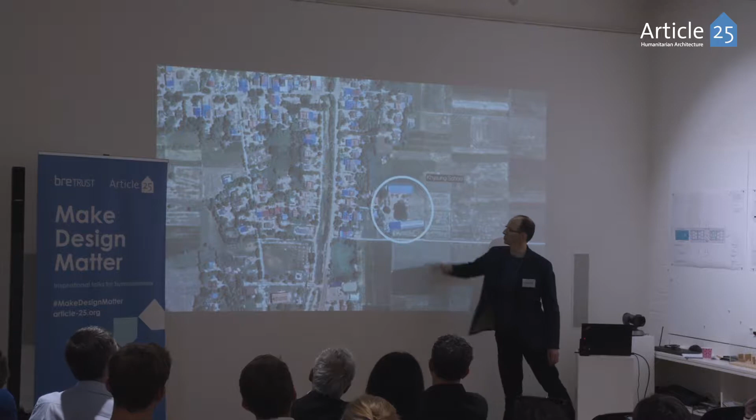So the village itself is relatively small, and the site is an existing school which had two buildings, a large block here and a smaller one here, very much built around a courtyard sort of space, and it was built on the edge of the village, looking out over vast expanses of rice paddy fields, with the core centre of the village to the other side. Central to the site was a series of really prominent trees, which are quite lovely, that you'll see in some forthcoming photos. The climate in Cambodia is tropical, so it has its monsoon season June through to October, and the very heavy rains that brings generally flood quite a lot of the school compound itself, and obviously the paddy fields themselves.

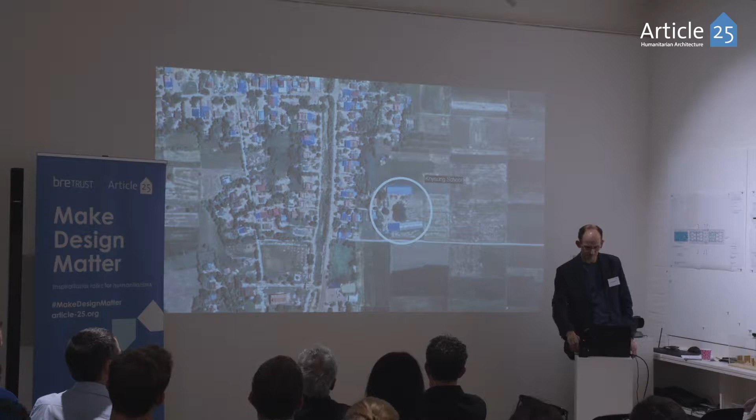There was generally always a Honda 50cc motorbike under there. There were always three or four very, very angry dogs if you went very close. For some reason, not many cats at all. Hammocks where, during the day, the villagers would generally sleep to avoid the temperature.

But then some really, really elegant detailing in the timber work. Generally the roofs traditionally were tiled, and it's a bit of a shame, but you can understand why: the more modern materials that are creeping in, with coloured sheeting for the roofs, etc., are changing that sort of vernacular a little bit. That was quite noticeable, but really beautiful.

And the primary colours that they were using then to highlight shutters on their windows or the individual panels for the cladding themselves, which was generally sort of timber.

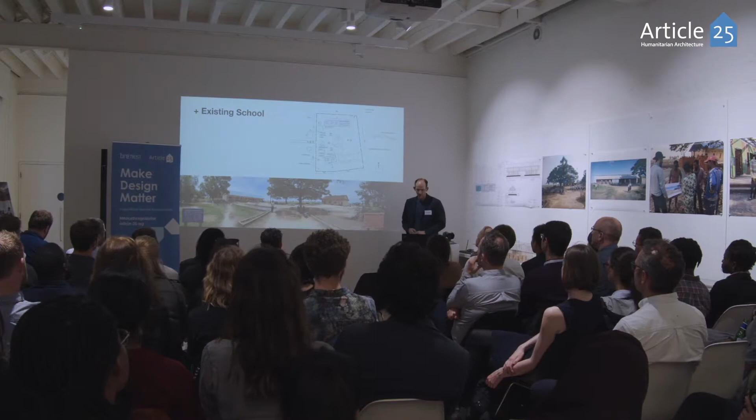So the diagram at the top shows the school compound itself. Building Trust did a lot of the early reconnaissance for us in terms of talking to the school itself. And the school was part of a group of village schools in the neighbourhood that all sort of connect. The Khyaung school was unique in the sense that it was primary and secondary, whereas the other five schools in the region were only primary. So they had a lot of pressure.

The population is growing quite immensely in Cambodia as a result of the atrocities back in the late 70s, so there's a real spike going on. So they are really lacking in school places, and a lot of the population don't have access to school. So part of the reasoning for this project was to increase that capacity.

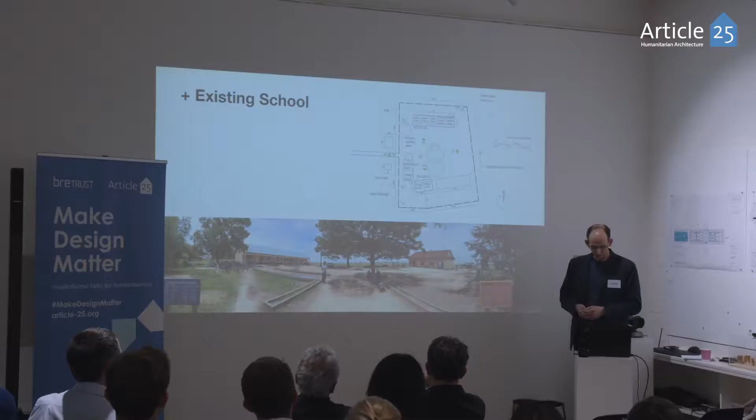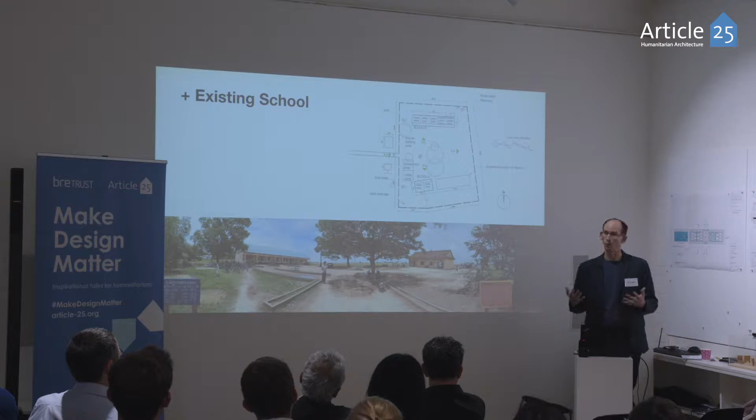And because they're overstretched, they run a morning school from 7 till I think 11 or 12, and then all of those children go home, and then the next wave come in for the afternoon. So they have to split the school day to cope with the capacity that they're dealing with. So our work obviously helped to alleviate that.

One of the older buildings on the site is quite dilapidated, so these images really show what they're dealing with. Particularly during the monsoon time, the rain is pouring through. They have to carry out a lot of their classes out under the verandas, actually outside. So that really demonstrates the need for the new school.

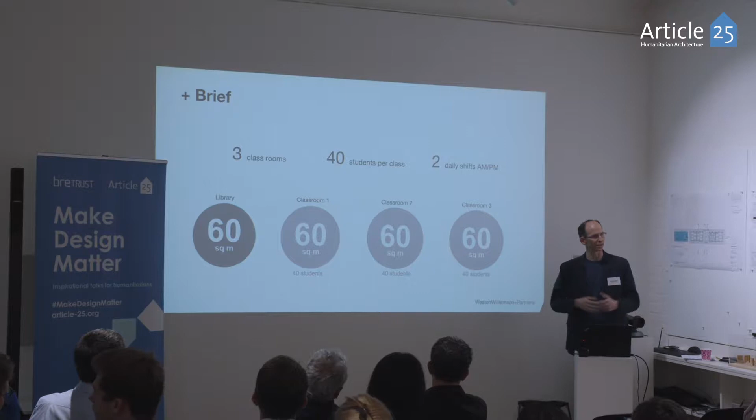So the brief we were given was to provide them with three classrooms, around 40 students each, and in terms of area about 60 square metres each, slightly larger than the existing classrooms they had. They were also keen to have a designated library space, which they were sort of squeezing into the corners of the current school buildings. And again, I've talked about the daily shifts that they still need to run to accommodate those students coming in.

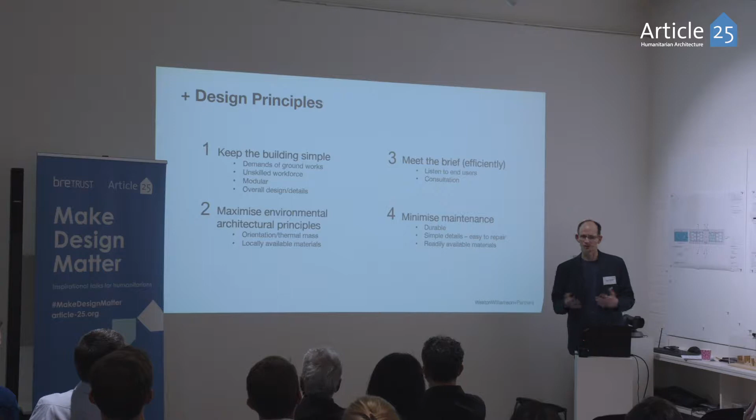And we worked with Building Trust again to establish, there's nothing too unique here, but it's really important to understand those key design principles at the beginning: what was available in terms of materiality, the labour, how we can deliver that; the environmental principles, to understand the climate and learn from their existing buildings where they're failing; particularly listening to them as the stakeholders, the teachers, and what the wider villages also need; and making sure that what we design is durable and long-lasting.

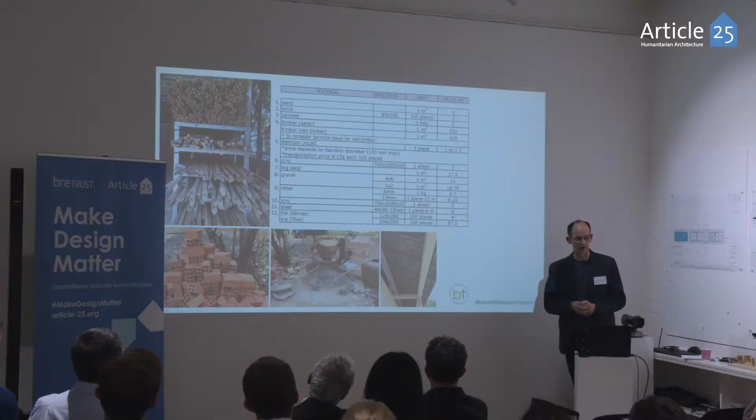We actually, in the end, developed our design not using some of the bamboo or so much of the timber, but very much the key, as you'll see as we go on, is that local brick module there with its 4 holes. That became a key part of our design.

So it was fundamental that we could hit that build program, otherwise we really were going to be pushing on another school year or another half a year before we could start.

So we ran the process from WW+P, once we'd established that brief and those key parameters, by opening it up to our whole studio, by giving them a briefing, and then we gave them about a couple of weeks to come up with their own ideas. And then we held a series of charrettes where they presented those back, and then a core group who were leading the project would then go through the quite difficult process of piecing together what we felt were some of those best ideas. But it was really fantastic. A lot of those then fed into the final design.

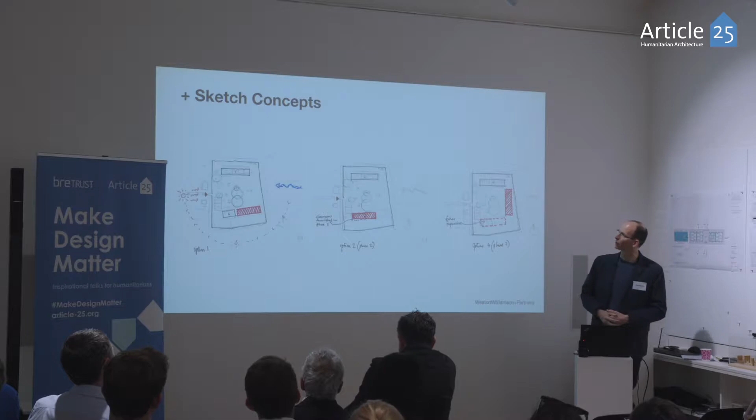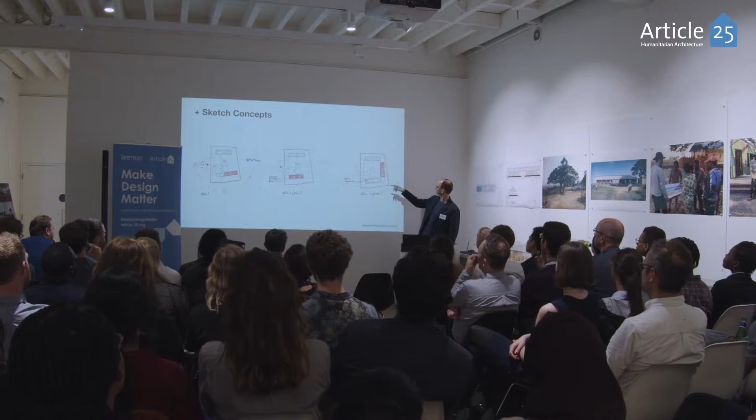So these are just a couple of slides. I won't go into too much detail, but some of the responses that we got. So some people took a very environmental approach. Others looked very much at the detail and form, and it was great to get that variety. This one was more about understanding phasing with the existing buildings, either to plug on or to build independently, or to think in the future how future expansion of the school could work in and around the courtyard itself.

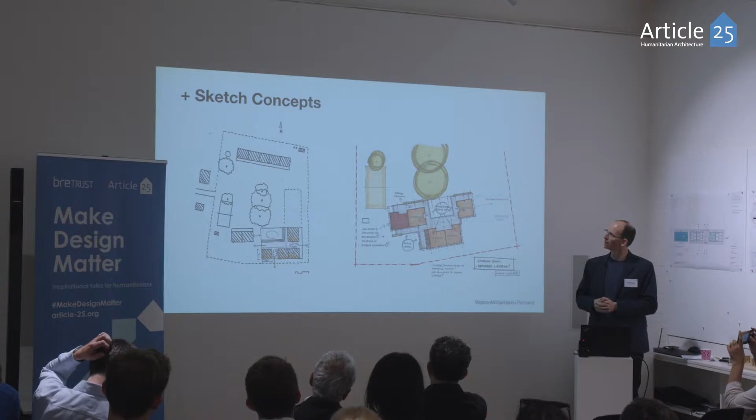A different level of drawing that you get back is always interesting. This is quite precise and detailed, and really looked at how those spaces could work. This was just one of our colleagues, looking at different outside spaces that are really important in and around those buildings. So not just the buildings itself, but where the children can play and learn, adjacent to the designs.

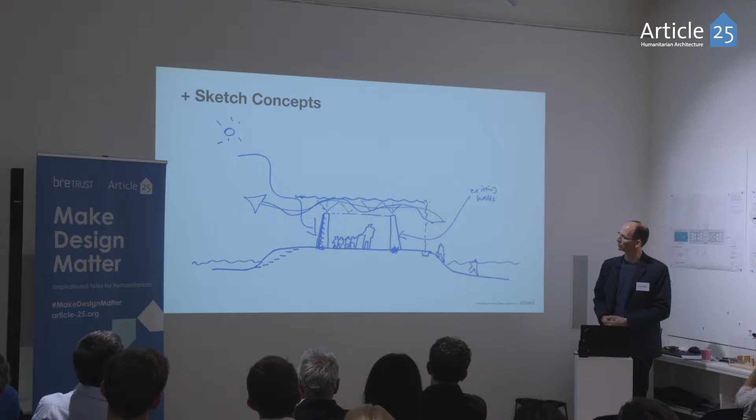Others that are much simpler, really just labouring on, and quite rightly, the importance of those fundamental principles of exploiting the passive ventilation, building on the plinth to avoid the monsoon flooding, etc.

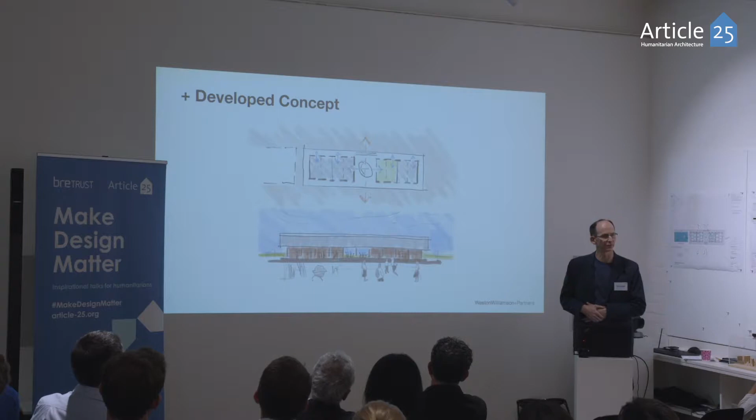And then we developed that to close in a more developed concept, of which this was an early sketch. And then we arrived at a very simple plinth building. The grey in the diagram at the top there indicates the 3 classrooms I've talked about. The green is the library. And then what we did, which has been I think one of the major successes, is just then pulling those apart to create this covered outside space, which is so important in the inclement weather, and provides a further view through to the landscape.

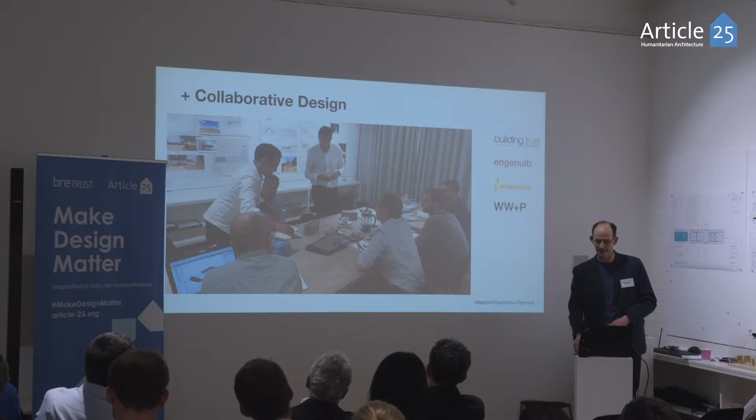And then Building Trust went out and took some of those early ideas. So that is very, very quick, but it just shows you a bit of that early stage consultation that they did, and then brought back some of those findings back into London, where again David here from Building Trust was over at certain points, and then working through bringing some of those materials, the brick, onto the table, so that we could get a real feel for those early days. And then as we progressed, we just worked up the level of detail of those drawings through more developed sketches.

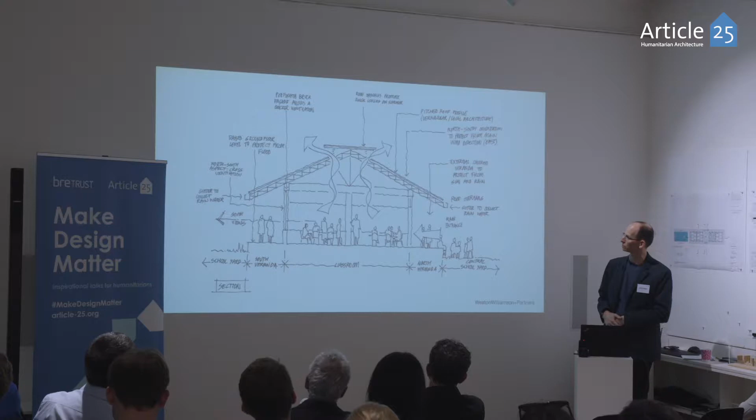Understanding the sizes, the modules, the grid that we were going to use in a bit more detail. And again, through in terms of the section, and again, working with our team here to understand what size overhangs we need, how the structure was beginning to work, the spans, and how the passive ventilation was starting to play out. And then we produced a set of tender drawings, again discussing with Building Trust the right level of detail that they would then take out to tender to chosen contractors.

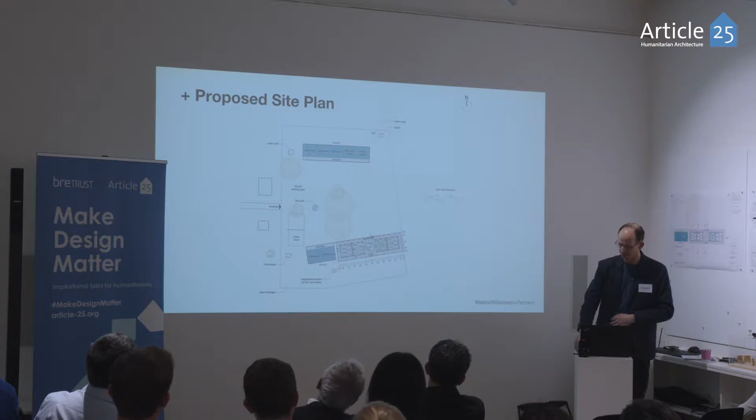So this is really just to show you the level of detail that we went to in terms of information that formed a pack itself. So again, a high level drawing of our building placed within that compound. And then the general arrangement drawing, broadly working on a 3.5 metre grid across the site. And some of the key sections and elevations.

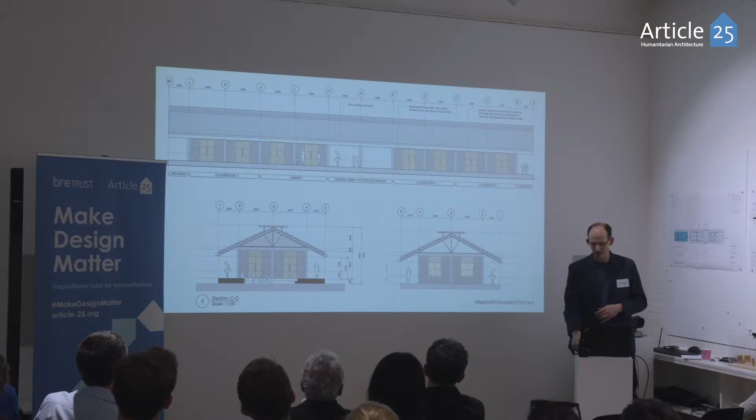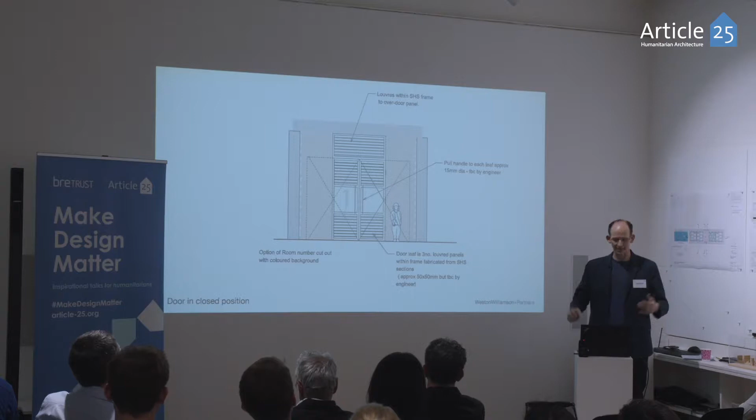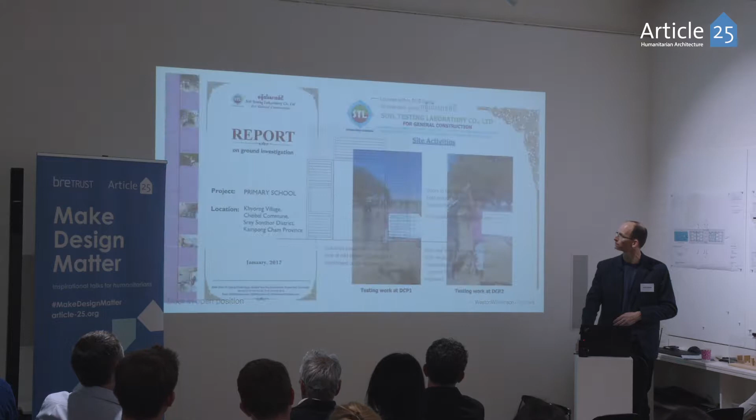So it's a bit of a jump into John now to come up and talk about some of the structural design in a bit more detail and some of the things we had to wrestle with on the site. So come on up, thanks.

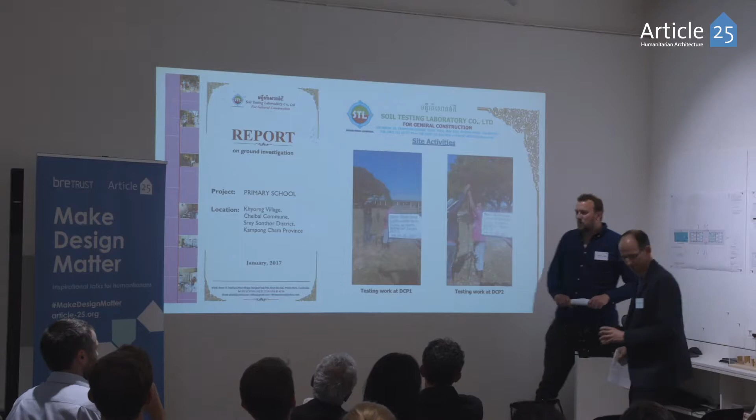We were quite delighted to be asked to help with this project, and it was something quite unlike anything we'd done before. We'd built plenty of schools, we worked internationally, but we'd never put the two together in quite this way. So when we were asked, we actually just paused for a moment and went and asked our engineers, if we do this, are you going to support us with your time and ideas? And there was a resounding yes. So we sort of dived in.

And as a structural engineer, thinking about this project, the first thing we like to do is think about the design criteria. What is it that's defining how we're going to design this building? And we've already heard about the climate, which is the massive one. So we've got this very hot and wet climate. You've seen the impact on those existing buildings, the timber rotting away and things. We've seen the raised podium. We need to include all these things into our design.

On top of that, we've got things like the local design codes. Well, they don't have any local design codes. Most of what's built in Cambodia at the moment is through international aid. And when people do that, they bring their own codes. And we did the same, unfortunately. We used Eurocodes.

This is one of the first things, it took quite a while to get it. One of the first things we asked for, and in January we received this little report, which for us was very important. It's a very simple site investigation. It tells us what the quality of the ground is like, where we can found this building, and just to keep it all safe and strong.

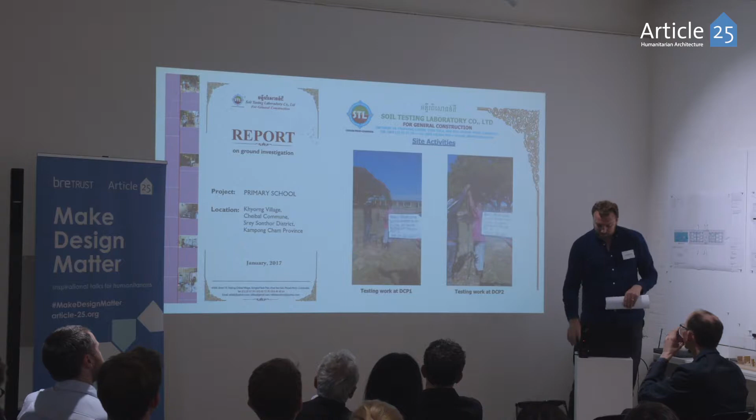Oh no. Oh, I'm missing a slide, am I? Yes. Never mind.

We've also seen previously that material list, and it is a very limited material list. If you delved into that, you would have seen there was sand, there was big sand, there was cement, there was rebar. You've got reinforced concrete. There are masonry units, there were steel angles, there was everything you needed for a simple building. And we wanted to bring those materials together, and as Phil said, this is a building which had to be built by the community, with the community. It had to be very simple, but we hoped we were going to learn from the existing buildings and maybe just go a step further and improve it slightly.

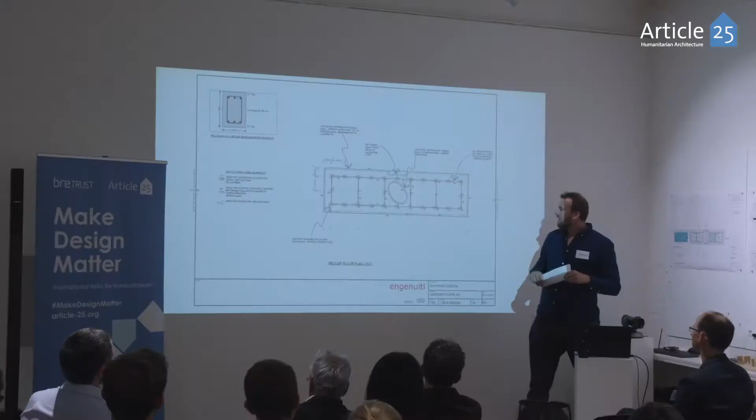So what did we do? It's an incredibly simple building. It's a concrete frame building with concrete columns dotted at the corners of each room and halfway between. It's all raised up on a large podium deck to keep it up out of the flood zone. And slightly unusually maybe, we've got a bamboo reinforced concrete floor.

I mean, bamboo reinforcement's not normal. Steel is better, but this is incredibly cheap. And what we're trying to do is control the settlement of this over time. We're trying to control cracking. And yes, in 15 years, you probably are going to have to come back and put a bit more screed or concrete on top. But that's fine, it's going to do a good job and we can afford it now.

Moving up the building, we've got a very simple thing again. It's a concrete ring beam which holds it all together. So we've concentrated our structure just into that frame. And in doing that, we've left all these spaces and gaps, and that's going to allow the architecture, your ventilation, your light, and everything to play as it wants.

The traditional buildings around the site, they're normally masonry. They're quite heavy, which is great from a thermal mass perspective, but from a ventilation and light perspective, I don't think they were fantastic.

I don't know, Phil. I didn't go.

So moving up, we had these trusses, and they look slightly strange, and that's because the shape of these trusses was developed very closely with Integration and Weston Williamson to really look at the orientation of the building and the climate and how best we could build with these materials to provide, not a warm climate, but a cool climate inside. And through live modelling within workshops here, we actually found this little top vent solution was the most effective way of doing that. And so we end up with a rather strange little truss.

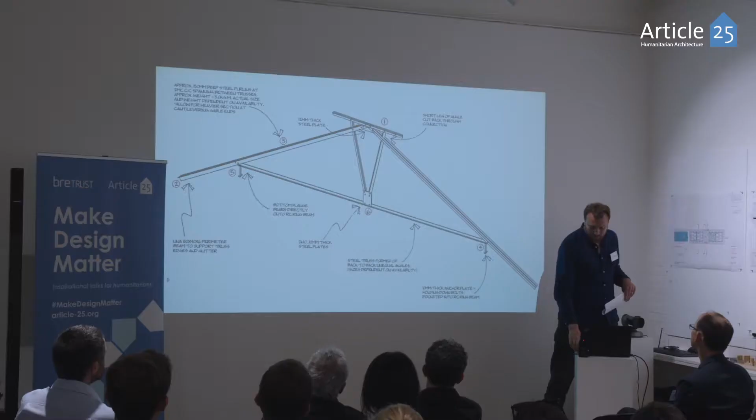And it's a strange little truss of the very same back-to-back angles that we had on that list of 12 items. So everything here is as simple as it could be. And if you had a hacksaw and a drill, you could build this quite simply, we hoped. To that, we added some really simple details. We need to hold these down into position. So we developed very simple details, which were modelled in 3D, again, just making it as simple and as clear as possible to be built locally.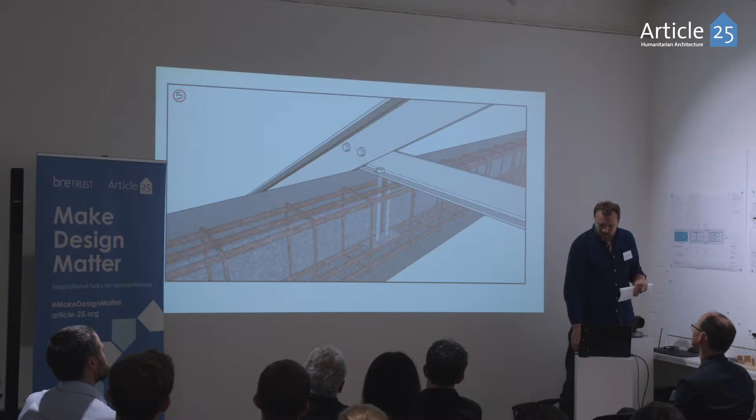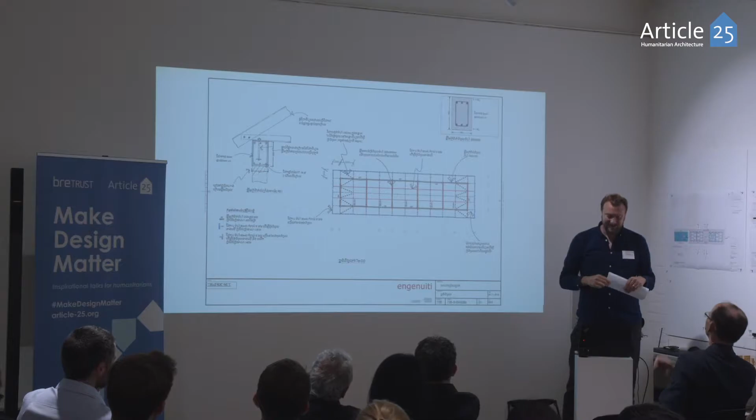And then we packaged all this information up, as Phil said, for tender. So everything got translated locally. So we hope this says what we think it says. It says 200 by 200 there, that's right. We don't really know. We didn't go through the exercise. But that went out to the contractors. So there was going to be a local contractor who was going to partner with the Building Trust and the local people to try and deliver this.

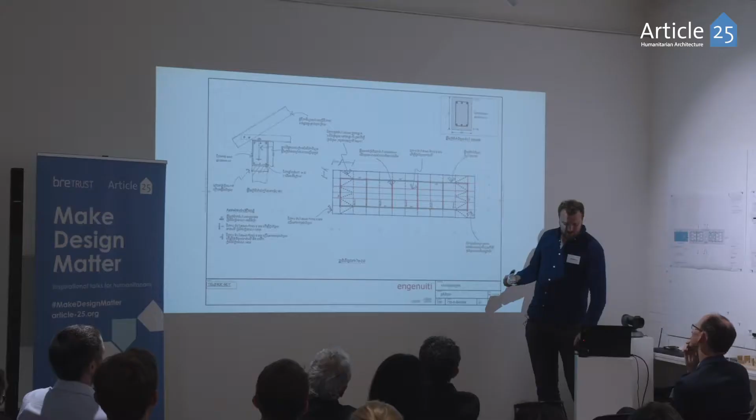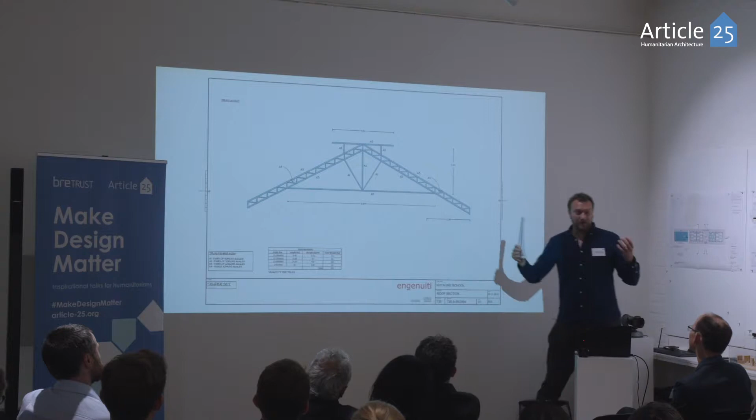And all contractors everywhere, the world over, have better ideas, apparently. So very rapidly they came back and told us that what we thought were quite nice little back-to-back angle trusses should be a truss made like this. And despite the fact this has a lot more material in it, and we thought a lot more effort because you've got to weld this all together, this was cheaper. So who were we to say otherwise? So we rechecked this, and of course it was absolutely fine. In fact, it works better for the cantilevers. So great, off they go.

And we're going to hear a little bit about it on site in a moment. But when it did get to site, those trusses went in, and they had a better idea on site again, and now those tie trusses became propped in the middle with another big truss, which is a bit strange, but we back-checked it, it's fine. But yeah, it's kind of relieving to know that contractors the world over are basically the same.

I think, Eugene, you're going to tell us a bit more about site. Cheers.

Hello everyone, I'm Eugene Healy. I'm one of the architects here at Weston Williamson. I was very lucky in that I was not only involved in the design, but I was one of the team that went out to the site to help with the build and witness the building go up. So I'm going to talk about that experience, and it certainly was an experience. But also, before we could start that, we obviously needed to find a contractor.

So once the structural design was complete, Building Trust issued a tender package to 3 local contractors, and this was the winning submission by a local contractor called Ros Sothy, who turned out to be a remarkably patient man, a very friendly guy, made us feel really welcome.

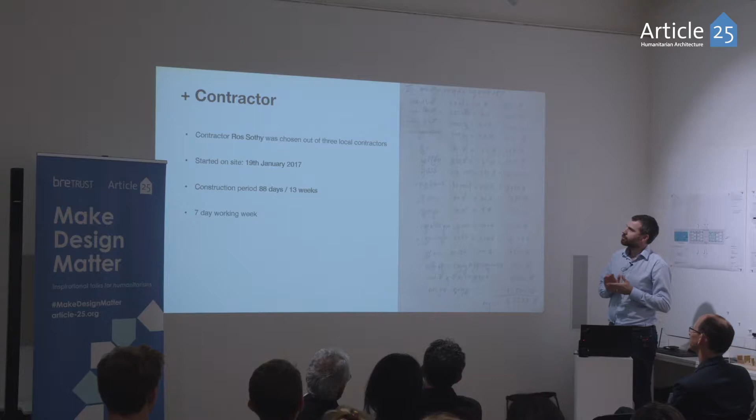But I think this process really illustrates the value of having people like Building Trust on the ground who understand the local market and who can interpret a bill of quantities in Khmer, and who also know to approach local contractors who employ local people and are embedded in the community, so they're encouraged to do a good job because their reputation really relies on it.

And this was the local workforce, not a collection of professional contractors, more a band of local community farmers who tend to go wherever the work goes. So they would come to site depending on what particular skill was needed on the day. So quite rare to have everyone on site at once like this. Quite often a team of 4 or 5 people just working through the labour with us on the site. And they were supported by a team from Weston Williamson.

So our approach was very much to send people out in pairs throughout the build at particular work stages. So first Tom and Michelle at Earthworks, Mahdi and Daryl when the RC frame was going up, myself and Patrick when the brickwork walls were being erected, and then finally Rowan, Ivana and Phil when the roof trusses were going up and the finishes were going on the building. And that gave us a real flavour of the entire construction process. And then afterwards, Mahdi and Chris visited the site to see what it was like in use after it was completed.

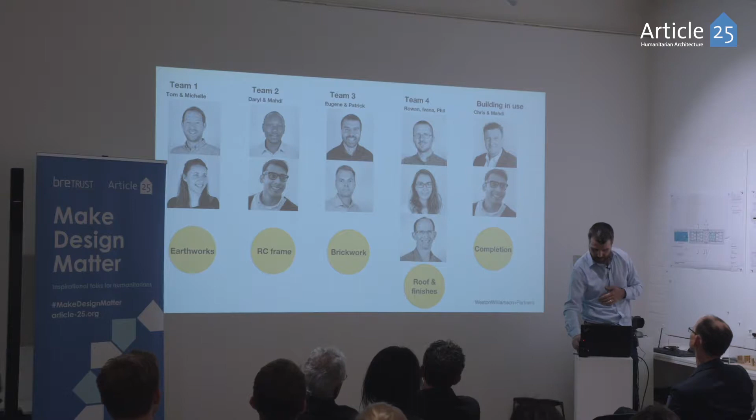One of the things we wanted to do was to be very close to the building site. Perhaps not as close as this, so we were offered accommodation in the headmaster's office, which was probably a little bit too close for comfort. But what it offered in terms of convenience for the site, it also offered in terms of inconvenience, in terms of sleeping arrangements. So we mustered together some desks to form ad hoc beds and tied mosquito nets from the roof.

And probably my biggest single memory of this is that we didn't just have ourselves for company in there at night. You're obviously in the middle of a very rural setting. And although I never saw it, there was a very, very loud gecko which snarled violently all the way through the night. I never saw it, but in my imagination it was 6 foot long. So I often greeted the dawn with great relief.

And I think being on site kind of gave us the exposure not just to the construction process, but also to school life. So we're really embedded in the school. So at one end of the site in the morning, as Phil mentioned, the kids would gather for assembly. And at the other end, the construction team would gather to talk about the work to be done during the day using models and visualizations and the drawings.

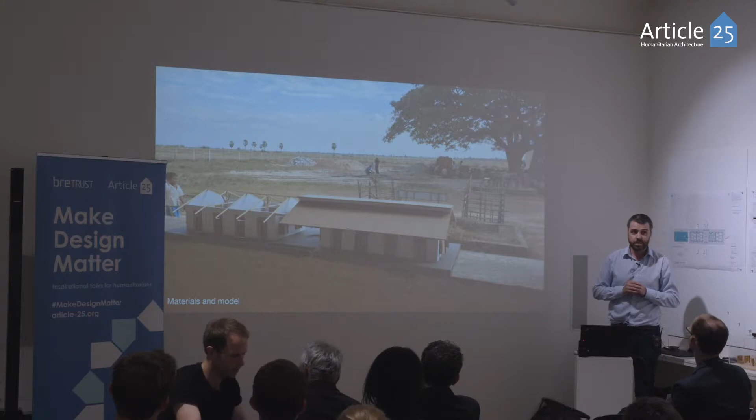And indeed, the model was something which we did quite early in the design process. And that was really a useful tool, not just at construction, but during the collaboration and trying to communicate with the local community just what the building would be like. It really communicated so much more than just a series of 2D drawings. And that's very early stages on site. You can see the materials just beginning to arrive.

And when the work did start, it was remarkable the extent to which it's all done by hand, a lot of manual labour in very, very hot conditions. As Phil mentioned, there was a race against time to do it before May arrived, and with it the startlingly hot conditions and the rainfall. But even in February, it was very, very hot during the middle of the day.

The other remarkable thing for me was the extent to which everything was constructed from raw materials on site. So I guess in the UK, we're used to a move towards off-site construction, things coming as prefabricated. But very much here, things turn up in their raw state, and then the team spend a long time constructing things from scratch. So for example, the clips for the rebar arrive just as spools of wire. They get cut into lengths, then they get straightened, and then they get formed into clips using very basic materials and tools. That gave me a real sense of how buildings are built up from the very bones, really.